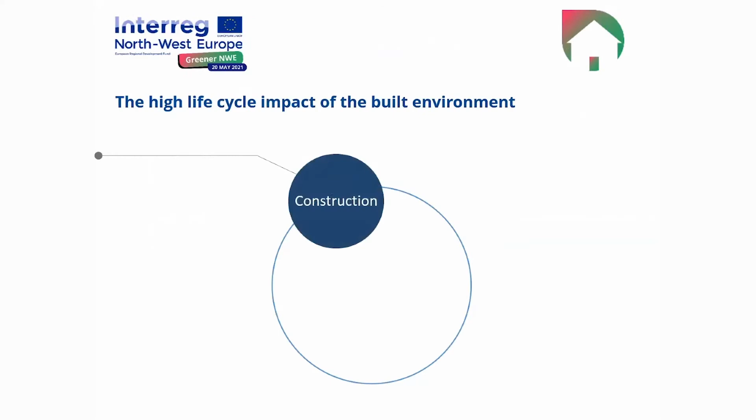To begin with, we wanted to give a note on our definition of green construction. What we're talking about is that the built environment has a very high environmental impact over its life cycle, which we can break down into 3 main phases. First, there's the construction phase, which starts with building conception and material extraction and production, determining how resource intensive a building will be. This phase consumes about 50% of primary raw materials in Europe, making it a potentially high impact portion of a building's life cycle.

There's also the utilization phase. We know that buildings are not static; they're actively consuming resources, emitting greenhouse gases, and generating waste over their life cycle. And at the end of life, demolition waste represents the largest waste stream currently in the European Union.

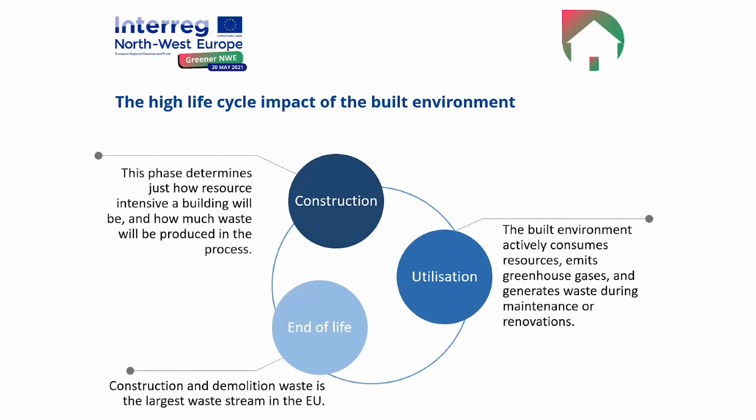With these problems in mind, the Northwest Europe program provides a framework to act through cooperation. Within the current program, we have 2 main priorities addressing this: low carbon and resource efficiency, working to mitigate and reduce greenhouse gas emissions from the built environment, as well as to help move towards a more circular economy for building material waste and raw material consumption.

This isn't the end of it, though. There's also contributions to larger frameworks, such as Sustainable Development Goal 12, on resource consumption and production patterns. Many projects have also been contributing to EU-level policies, specifically the Construction and Demolition Waste Protocol, the EU Action Plan for a Circular Economy, and the EU 2020 Strategy for Sustainable Growth. We've also seen projects on the ground, based on their own implementation experience, contributing to these policy frameworks to help improve them.

We've seen 13 projects within the Northwest Europe program addressing these 3 main phases of the built life cycle, but they are not limited to their own sections. For example, many projects working at the end of life are trying to facilitate reuse of building materials within the construction phase, and projects within the construction phase are trying to take building elements from the end of life cycle to help make more circular products.

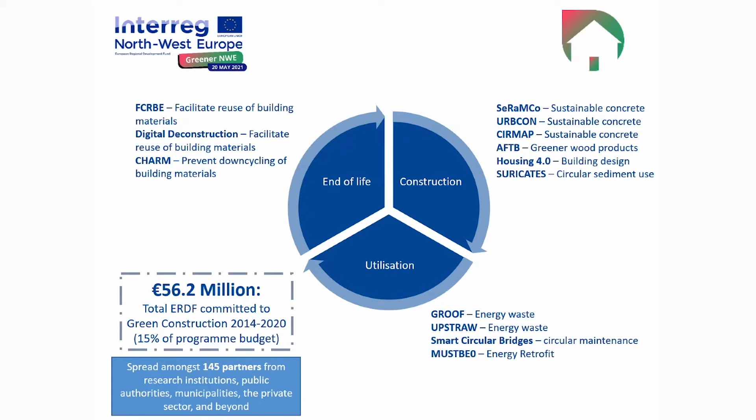Within the 2014-2020 program, we have committed a total of 56.2 million euros of ERDF funding, and green construction has contributed about 15% of the total program budget. This has been spread amongst 145 partners from research institutions, public authorities, municipalities, the private sector, and beyond. Luckily, cooperation has produced new products, new processes, and has laid a foundation for material recovery and reuse, and greenhouse gas emission savings in Northwest Europe.

We see new products, including new concrete made from circular mixes, new monitoring equipment, new bio-based building materials, low-carbon homes, new processes which have been helpful in facilitating the reuse of building materials, new practices to reuse sediment and circular products, and new practices for net zero energy retrofits.

The results that we've seen early on have been hundreds of thousands of tons of materials reused and recovered, new funding leveraged, cooperation with research institutions to bring their research mainstream, and contributions to policy frameworks at the EU, national, regional, and local levels. What we're looking for going forward is not for projects to try and cover all aspects of this loop, but for them to be creating enough synergies amongst themselves to complete this loop.

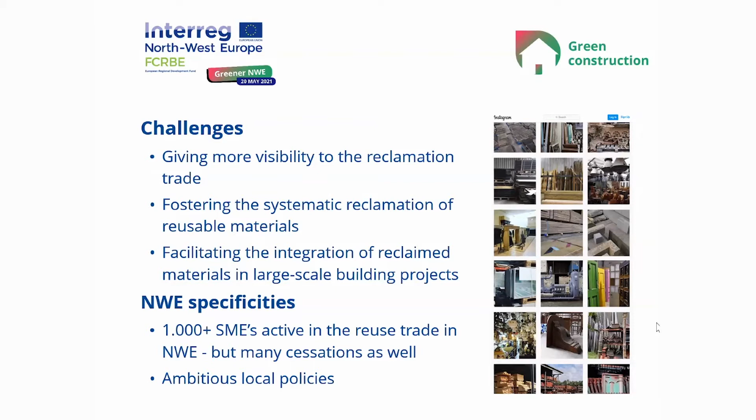We can go to the next slide. Sorry. So at the very end, our objective is to increase by 50% the amount of materials being circulated for reuse in Northwestern Europe by 2032. Maybe a slide before this one, if it's possible. So maybe just for the project results.

So we are currently developing 2 comprehensive guidebooks, one to conduct reclamation audits, and the other one on how to specify reclaimed building materials in large-scale projects. We are also conducting 36 pilot operations in live projects to test the method and to get feedback from the field, to support stakeholders and to foster reuse, and obviously to reclaim and reuse materials. We are aiming at circulating 360 tons of materials by the end of the project.

We're also developing a truly reclaimed label with the trade. The objective is to enable consumers to make the difference between authentic reclaimed products and new products imitating reclaimed ones. And also we are working on 40 material sheets, providing valuable references to architects and builders without prior experience with reclaimed products. These sheets highlight products that are steady on the reuse market and with a good level of services. I'll give the floor to Michael.

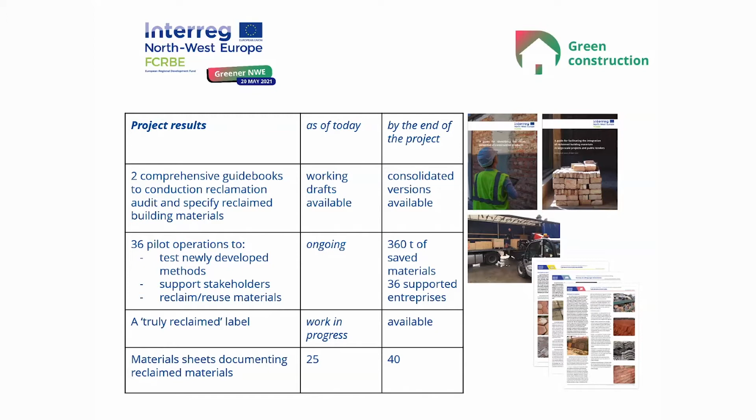Hi, everybody. In terms of pushing the result further, we are very happy to have successfully applied to the call for capitalization, and it will allow us to develop our efforts on 2 new fronts. First, reaching new target groups, namely introducing the building trades, the organizations and companies that are downstream the development of a project, to adopting reuse practice in their daily activities. And second, to develop a coherent method to set, measure, and report on reuse objectives as part of a public tender, for instance, or as part of a project development.

As of today, we estimate that only 1% of building materials are effectively reused after their first use. So the challenges ahead to increase that amount are still huge, to say the least. Hopefully, our project can contribute to tackle some of the challenges hindering these practices today, but there's certainly still a lot of work to do, notably in terms of adopting public policies that are more reuse friendly. Next.

The added value of the partnership is probably based on the fact that the FCRBE project is really built on foundations laid previously at local levels by the different project partners. And so in this sense, the project is an opportunity to bundle these local efforts in a more coherent and more general, ambitious way.

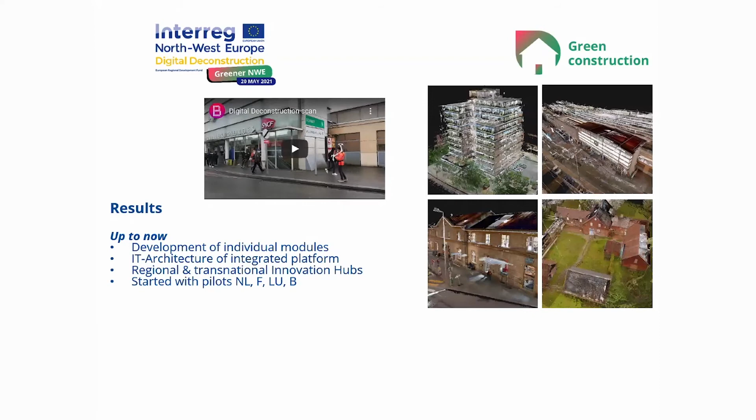And also the next thing is we'd like to have innovation hubs, mobilizing the key innovation stakeholders and small and medium enterprises in the construction and demolition sector, so that we can create a market for this recovery, which can also be connected to the previous speakers, so that we can actually make sure that we have a circular economy based on those two projects together.

Up to now we have developed several individual modules, like 3D scanning. We have got a blockchain module. We've got material passports, a material database, and we've got reversible BIM, which all will be integrated in one platform. We are currently developing the IT architecture, and we have set up some regional and transnational innovation hubs. And we started with 4 pilots, as you can see on the right.

In the left corner, we've got the building in Heerlen. The building next is a train station in France. And we have got a train station in Luxembourg, and we have the heritage location in Belgium that has already been scanned and processed. We have got a small video I would like to show you.

I think Peter can start it, in which you can see how, for example, the pictures for the 3D scanning are made. So you can see this person walking around taking pictures, which all will be compiled together, and a point cloud will be made to analyze all the data. So this is just a short impression about this. What we would like to achieve is an integrated digital deconstruction system.

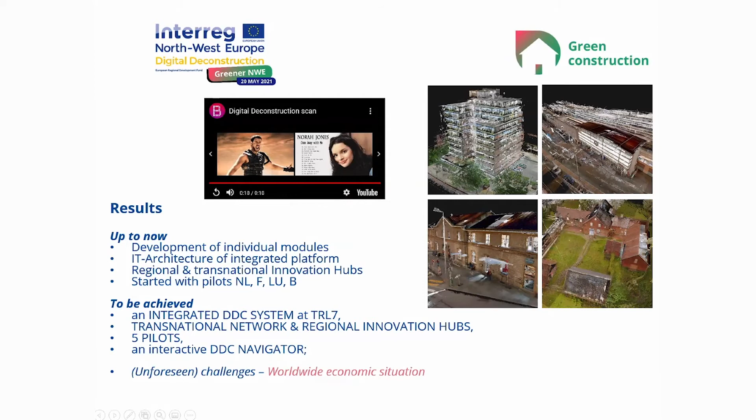Can you go? Yes, thank you. At TRL level 7. TRL level 7 means technology readiness level 7. It's a proof of concept of a pilot in an operational environment. Next to it, we would like to develop a transnational network of regional innovation hubs, all within 5 pilots. And we will have an interactive DDC navigator, where you can actually see in a simulation how the digital deconstruction works.

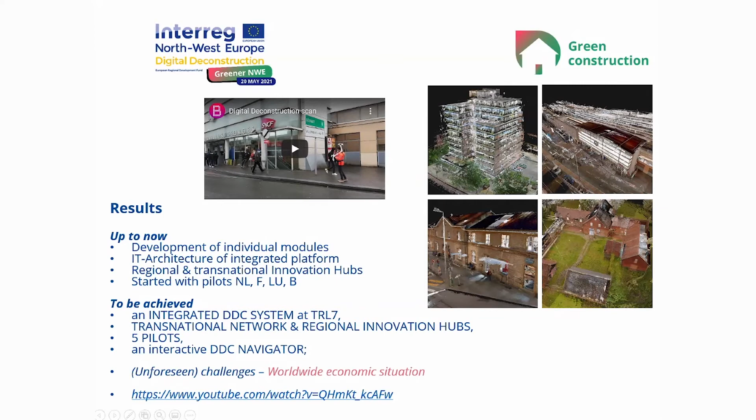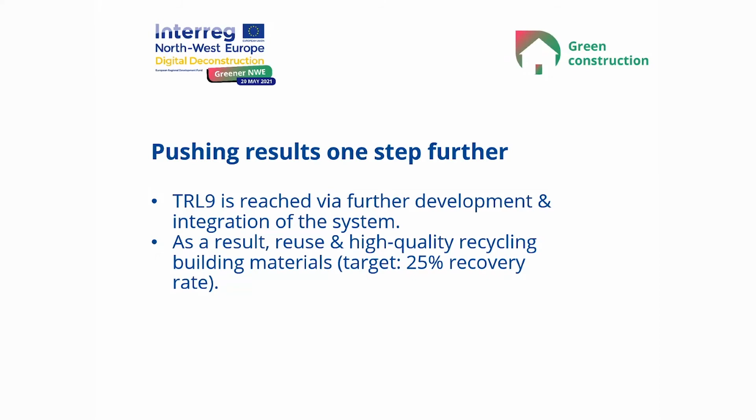And what we have seen is that the current worldwide economic situation has been challenging within this project, because we need to travel amongst different countries, which is quite difficult at this point, but hopefully will be better in the upcoming half year. Next slide, please. What would we like to develop? TRL 9, which is a completely market-ready system, and will be integrated and adopted within the construction and deconstruction sector in the upcoming years. And of course, we would like to have 25% recovery of building materials for high quality recycling within that.

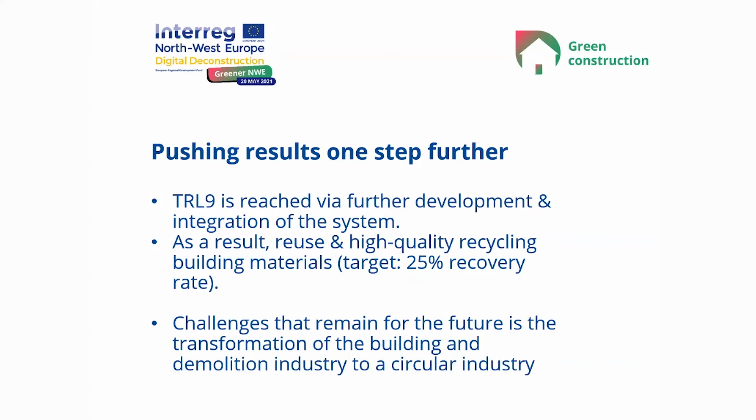Next. And challenges that remain for the future are, of course, the transformation of the building and demolition industry, because everybody needs to have a different approach to deconstructing and constructing in order to create a complete circular industry. And added value, what we have seen in the partnership is the collaboration among different countries, different areas of construction, scale, knowledge areas, and of course the cultural and economic differences that have been an added value to develop a complete system for Europe. And also at this level, it indicates that it is a very hot topic at this point, and we are very happy to have this at this level.

And of course, our partnership is a solid mix of different expertise, who all have great intrinsic motivation to actively contribute to the project. And these are great ingredients to continue working after this project. And we have got a lot of work ahead of us to create a digital integrated system. Thank you very much for listening. As you can see in this picture, it's sort of a representation of deconstructing instead of demolition, so that we can use all the different items within deconstructing.

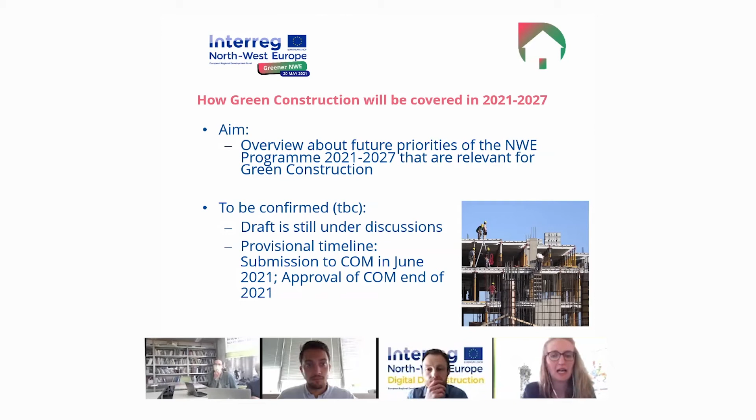And probably you're interested in which future priorities will be important in the field of green construction. But please be aware that, as you heard, discussions are still ongoing and slight changes might evolve until the program is finally approved. So yeah, while a lot of progress has been made, several challenges remain, as we will see on the next slide, according to the territorial analysis.

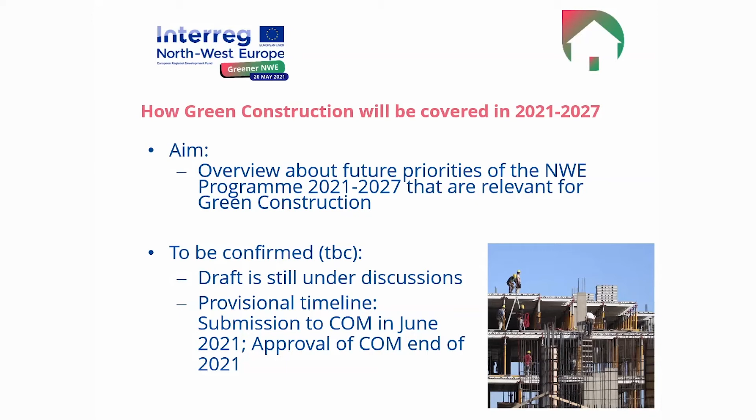And they are asking for further reduction of the impact of the built environment in Northwest Europe. They refer, for instance, to the high demand for primary raw material or to the low energy performance in many buildings. So thus, in order to make construction in Northwest Europe greener, it will be important, for example, to close the loop of material streams and to enhance energy efficiency.

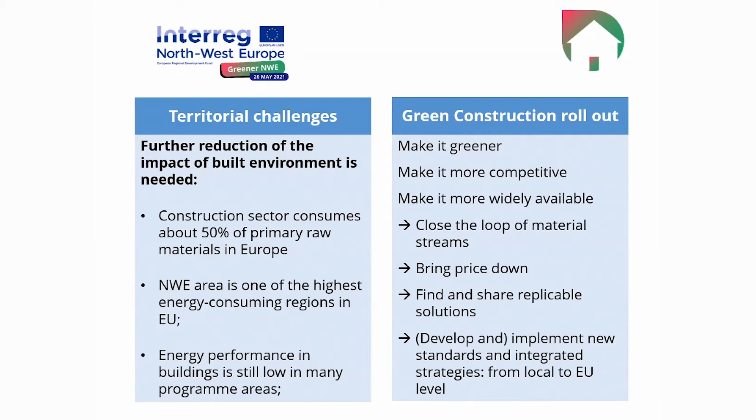In order to make it more competitive, the prices should be reduced because at the moment, raw material is cheaper than recycled material. And green construction has to be more widely available. Therefore, replicable solutions and the implementation of integrated strategies should be fostered. So to sum it up, there have been a lot of new technologies that were developed in the past, and this is why in the future their uptake and diffusion will be of importance.

The first one will be priority 3 because it focuses on the transition to a circular and resource efficient economy. And we have seen that numerous approaches will contribute to green construction in this regard. And as well, priority 2 will be interesting because here we will tackle energy efficiency, reduction of greenhouse gases, and renewable energies. So I would like to start with the circular economy.

And this priority contributes to the new Circular Economy Action Plan, and this is one of the main building blocks of the European Green Deal. But when promoting a more efficient transition, you have to keep in mind that the area of Northwest Europe is already rather advanced, yet know-how and benefits are unevenly distributed across sectors, geographies, and societal groups.